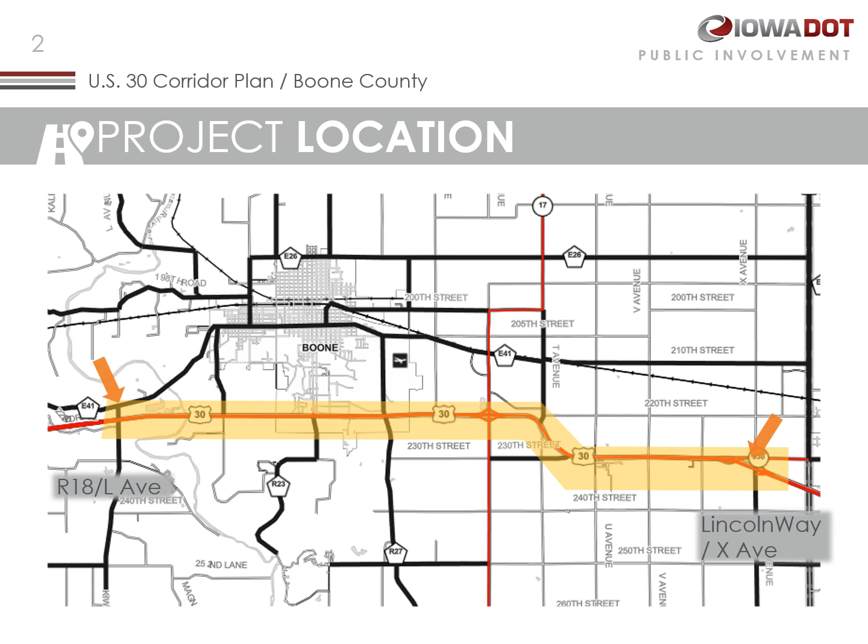The corridor plan has been developed to address crash history and potential, traffic operations, and develop recommended improvements for short, mid, and long-term planning of improvement projects.

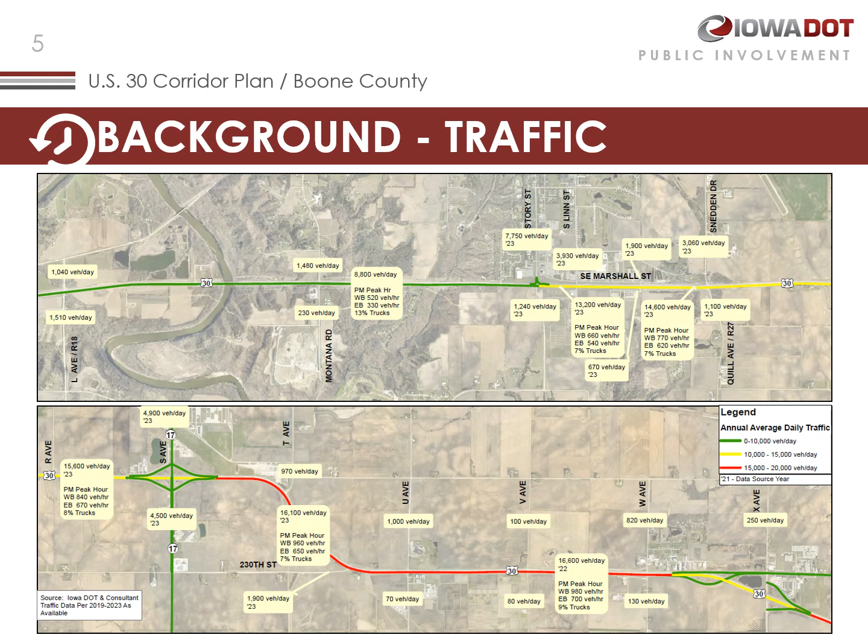Traffic over the past 10 to 12 years has remained relatively stable or experienced slight decreases and increases of 1,000 to 1,500 vehicles per day. The corridor has experienced 7 fatal crashes over the period from 2018 to 2023. 4 of these occurred at intersections, with 2 at Marshall in recent years.

Several intersections have a potential for crash reduction, or PCR, in the high, red color, or medium category, yellow color. These are in comparison to similar intersections statewide. The intersections with high and medium PCR ratings are the locations identified for short-term Phase 1 and Phase 2 improvements, specifically between South Story Street to Snedden Drive.

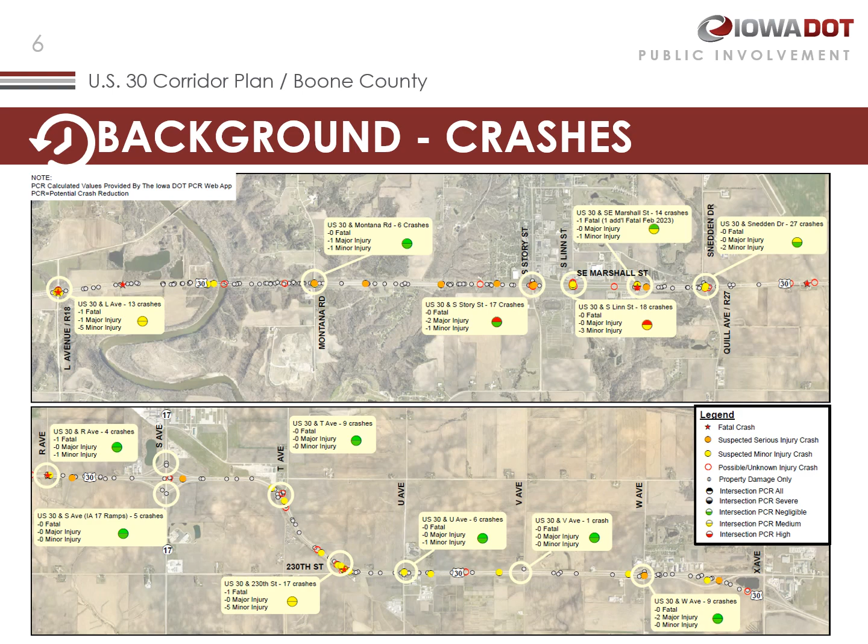The top priority for the improvements is to reduce severe and fatal crashes. It is important at locations with severe injury and fatal crashes to develop short-term feasible solutions that can be implemented in the next few years, yet maximize safety benefit versus the cost.

However, improvements also need to consider long-term corridor planning for US 30, similar to freeway access control through Ames and current work in Nevada to develop interchanges and limit access points. This could be the future need for US 30 between Boone and Ames.

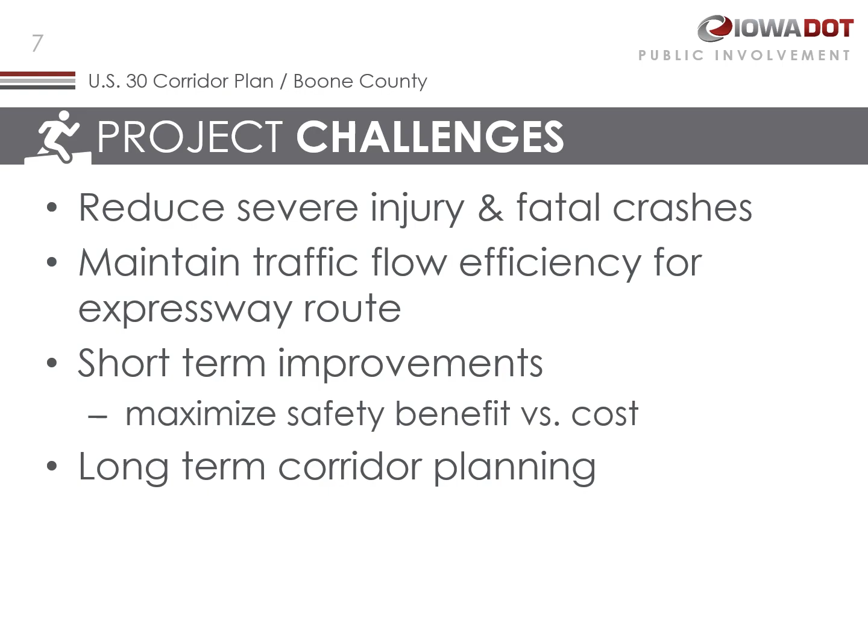Short-term opportunities with median closures, roundabouts, and reduced conflict intersections provide the greatest safety benefit versus the cost. These also have simpler design and construction and have the least impact on the corridor and right-of-way.

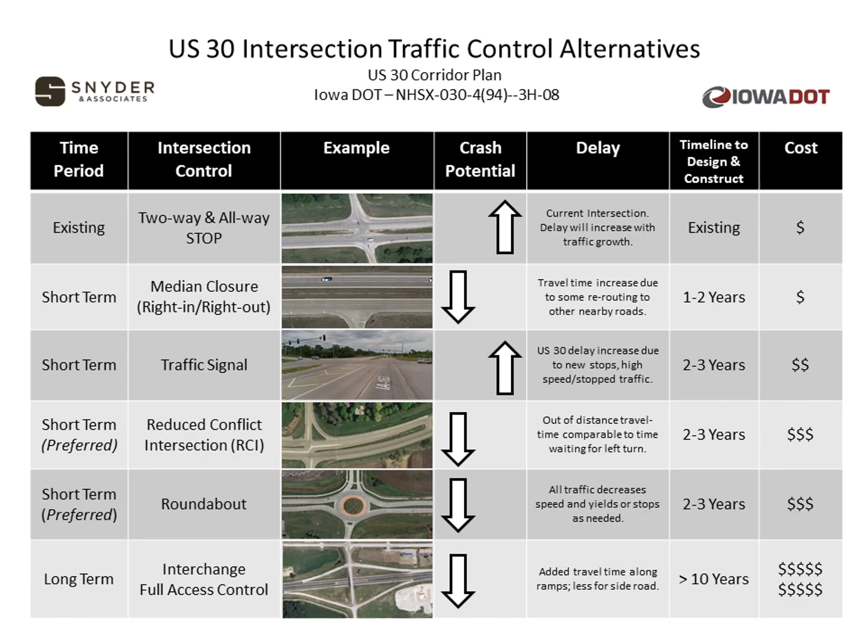Construction will begin this fall or next spring to close the median opening at 230th Street. Traffic on 230th Street will then only be a right-in, right-out movement, and US 30 westbound left turn traffic will reroute to the Iowa 17 interchange. Cost estimate for this work is $133,000.

Similar improvements were made to T Avenue in 2016, and a significant reduction in total crashes and severe injury and fatal crashes has resulted in the 7-year period since.

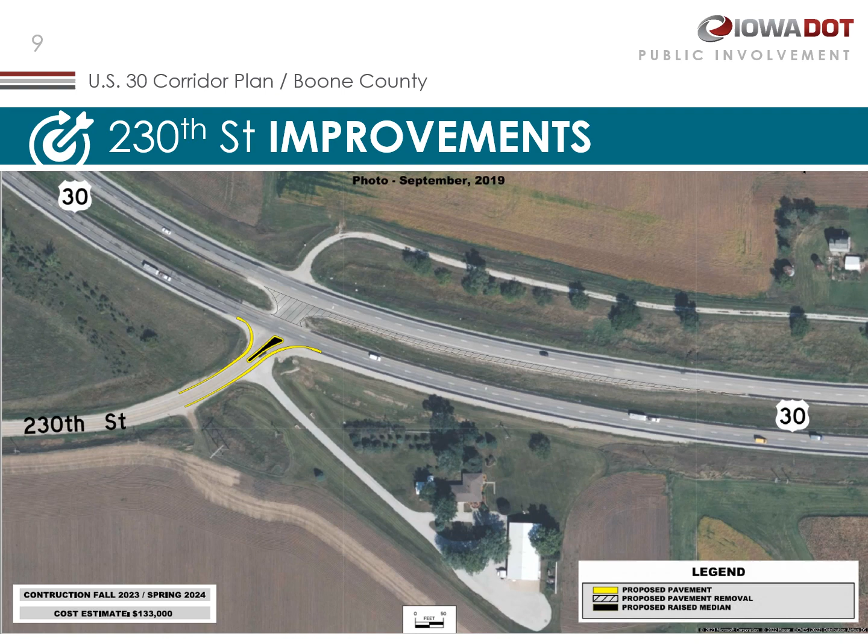Construction will begin this next spring to create an offset T intersection for R18 L Avenue by closing the north roadway approach and relocating it east. This will create 2 reduced conflict intersections to help mitigate prior severe injury and fatal crashes. Cost estimate for this work is slightly more than $2.1 million.

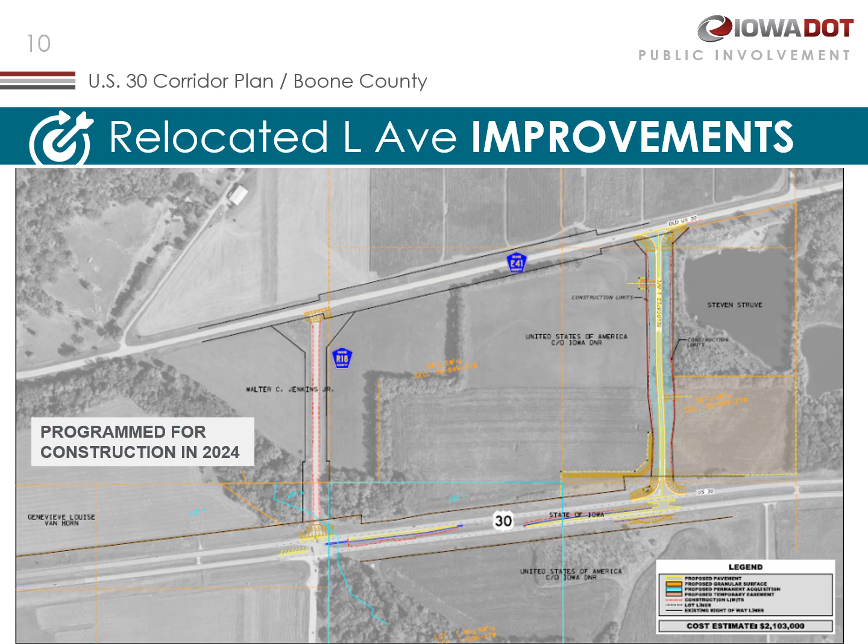To address the frequency of all crashes and the severe injury and fatal crashes between Story Street and Snedden Drive, a Phase 1 project is proposed to include a median closure to only right-in, right-out traffic at Linn Street and the reconstruction of Marshall to become a roundabout intersection to support the reduced speeds in the area.

These types of improvements have been proven to have a significant impact on severe injury and fatal crashes. Cost estimate for this work is approximately $3 million and could be designed and constructed in the next 2 to 3 years.

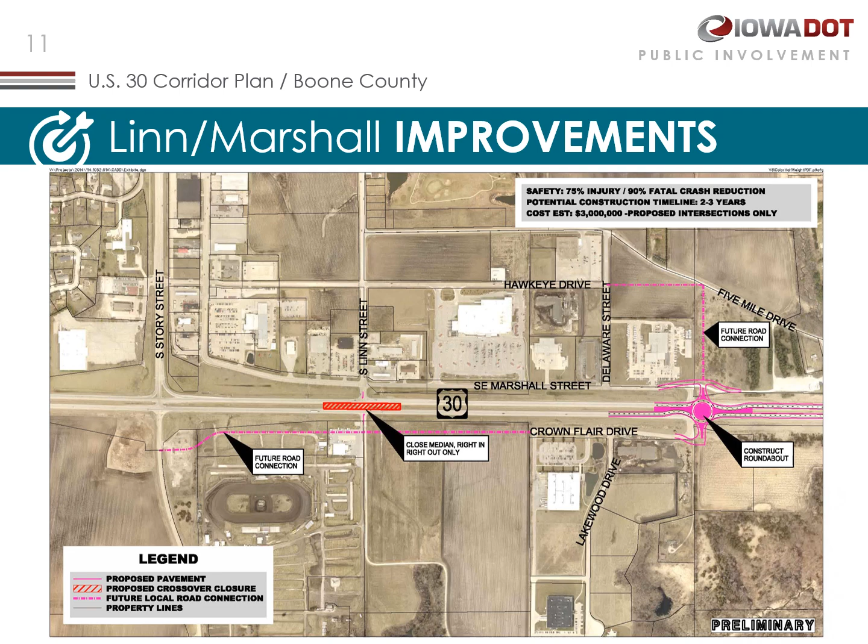An alternate B for Snedden Drive includes a reduced conflict intersection typical of higher speed divided expressway highways that simplifies the conflict of turning and crossing movements at the intersection through medians and downstream turn lanes. These help reduce the number of conflicts for drivers, thus reducing crash potential. It does require some additional driving distance, but no more than a quarter to half mile, and safety benefits far outweigh this additional travel. Cost estimate for this work is approximately $4 to $5 million and could be designed and constructed in the next 3 to 4 years.

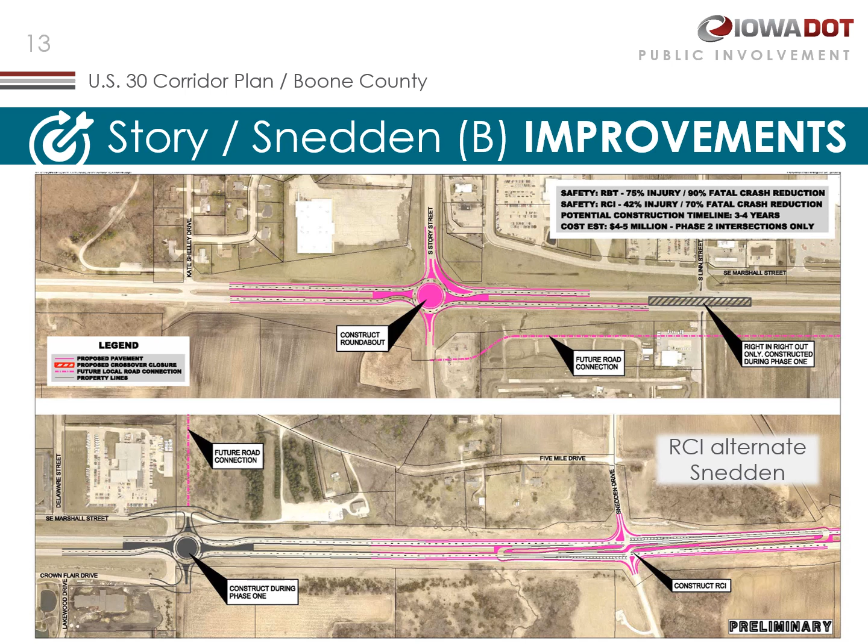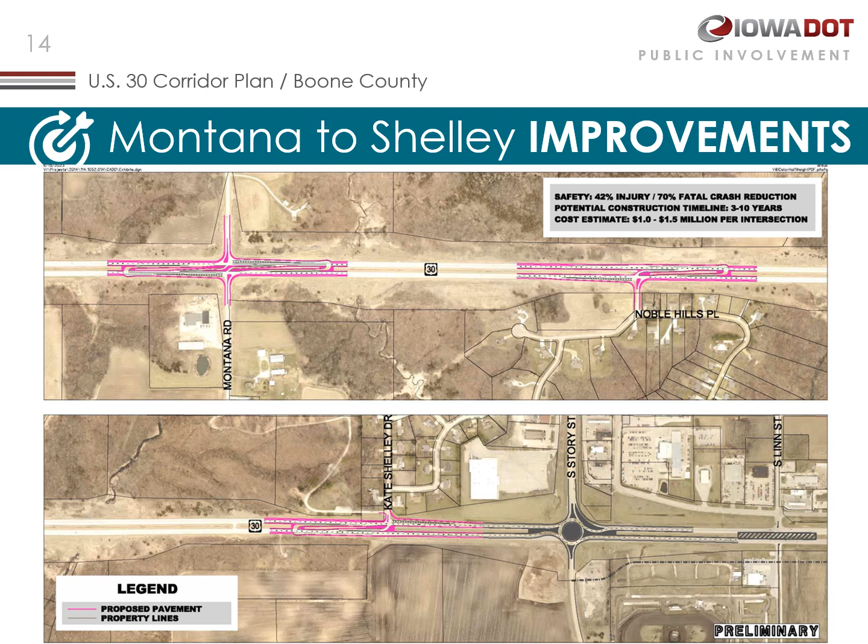If conflict increases and safety performance declines, other intersections like Montana Road, Noble Hills Place, and Kate Shelley Drive could also be logical locations for reduced conflict intersections similar to Snedden Drive. Cost estimate for this work is approximately $1 to $1.5 million per intersection and time dependent upon continued safety performance.

If conflict increases and safety performance declines, U Avenue is also a logical location for a reduced conflict intersection due to peak hour conflicts during the United Community School District year. Cost estimate for this work is approximately $1.5 million and time dependent upon continued safety performance.

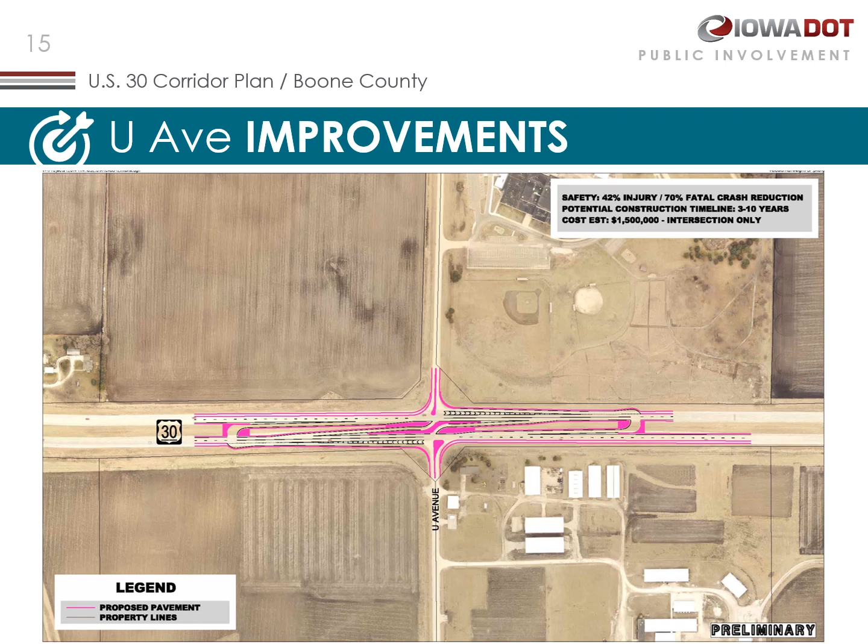Local road access intersections in between would require closure, and an extensive local frontage road street construction would be required to reroute existing local street and access drives to the new or existing interchanges. This would also require significant right-of-way purchase. This new network of streets is concept level only. Additional implications and much further refinement will be developed with property owner input if design would proceed.

A concept level cost estimate for the new interchanges and local street network is $70 to $80 million and could take a minimum of 10 years to be budgeted and all the associated right-of-way, environmental impact, and design work to be developed before construction could begin.

This exhibit displays the continued freeway access control between the existing Iowa 17 interchange and Lincoln Way X Avenue interchange. The concept includes a new interchange at V Avenue. Again, an extensive network of local frontage road street construction would be required to reroute existing local street and access drives to the new or existing interchanges.

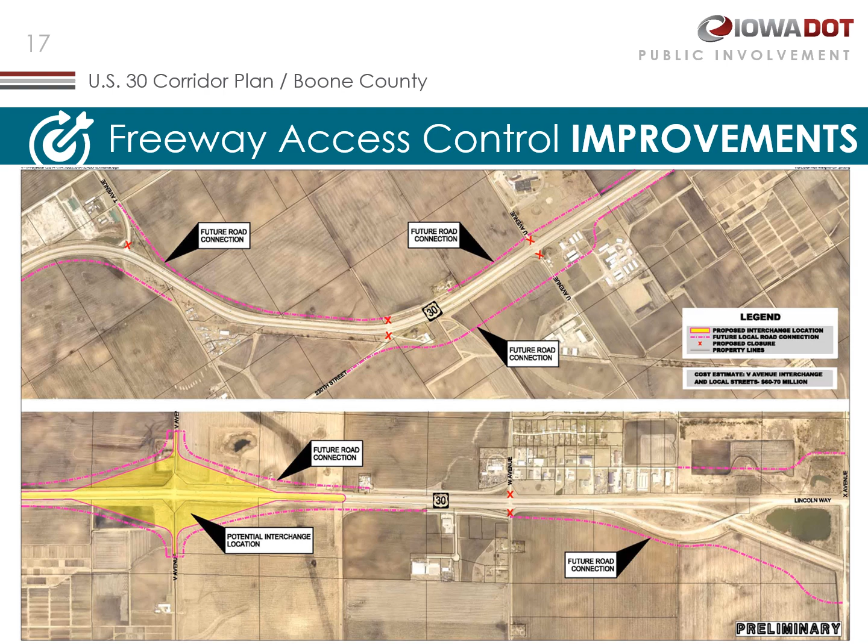Next steps for the corridor plan include the two intersection projects for 230th Street and relocated L Avenue, slated for construction this fall and next spring-summer. Final planning and safety funding budget process will continue for Story Street to Snedden Drive area for the intersection projects to improve safety.

To view additional information regarding the study or for an email link to submit questions or comments to project staff, please refer to the Iowa Department of Transportation website and the specific US Highway 30 Corridor Plan project page. We ask that you submit your comments and questions in writing through the web link on this screen by no later than June 30th, 2023.